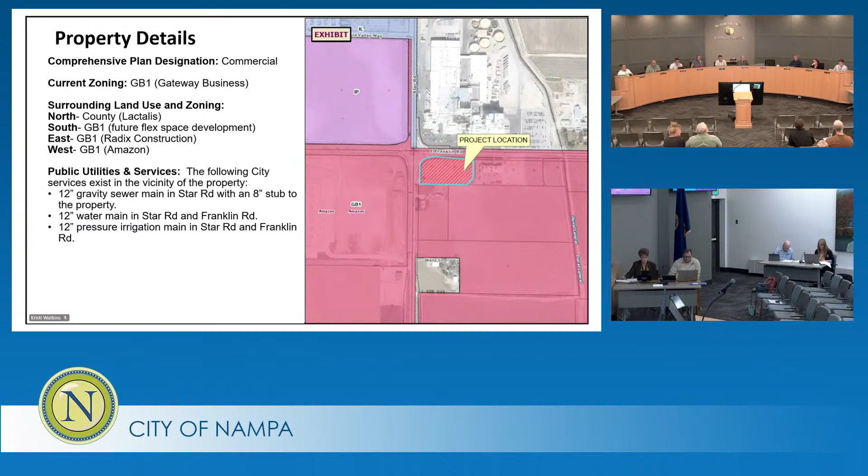There are public utilities and services available to this property. So a little bit of history on this.

This property was annexed and zoned to GB1 in 2008. It has a development agreement that basically describes this corner as a commercial corner and lists out some uses agreed to with the cheese factory previously, as far as what would be allowed and what wouldn't—fuel stations being one of those, with a conditional use permit.

In August of 2012, a development agreement modification was done just to adjust the schedule of land uses, and that was approved. May 2021 had a pre-application meeting, and July 2023 there was another pre-application meeting.

November of 2023, their variance for frontage landscaping was approved. The reason for that request was because Franklin Road has been widened based on the extension over to the new Highway 16, which cut into the frontage originally planned for that parcel, narrowing the space to a point where it wasn't very functional for them.

January of 2024, they got design review approved for their building by staff. The reason this is coming at the end of all these other things is they wanted to make sure those other items were taken care of first. Design review can be done at any point during the process.

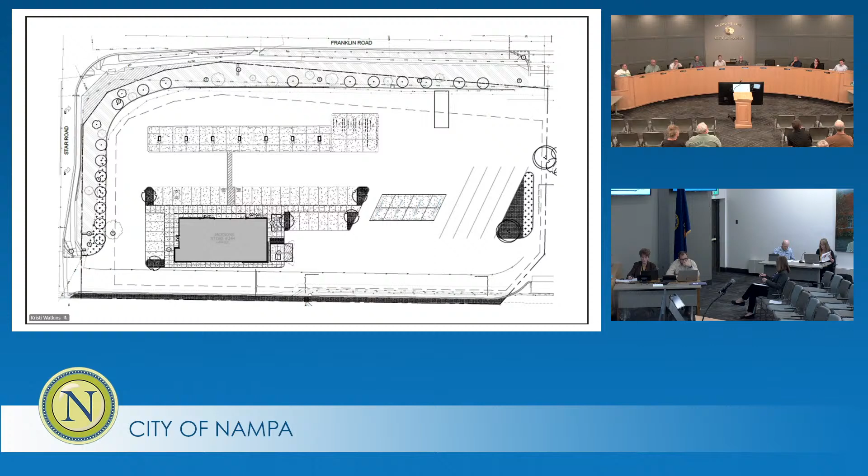Here's an example of the design review elevations that were approved. This is an example of the site plan that includes the landscaping with the variance that was approved. This is the conceptual site plan that was in the development agreement.

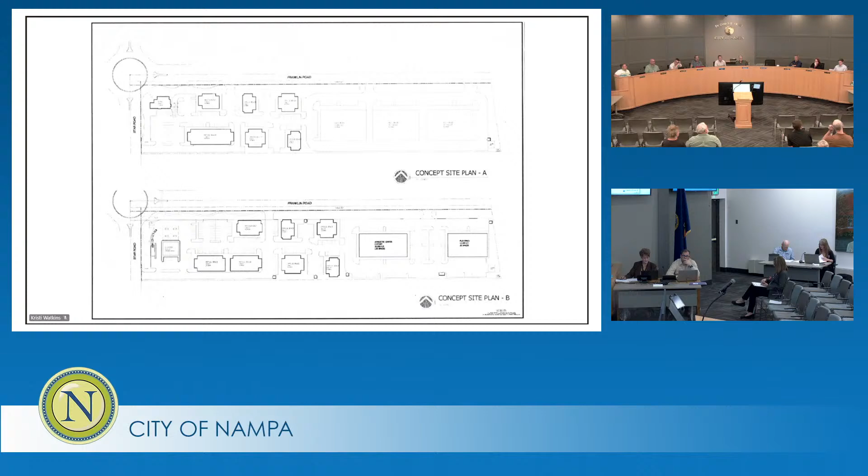As you can see, it's a commercial corner. It doesn't say specifically that it has to be one building or six buildings—I think there's some leverage there. This is the proposed retail elevation, which is actually what is built for the Radix building to the east.

Going back to the design review elevations, I think you could say that they technically meet the requirement with the jogs and offsets in the building elevation.

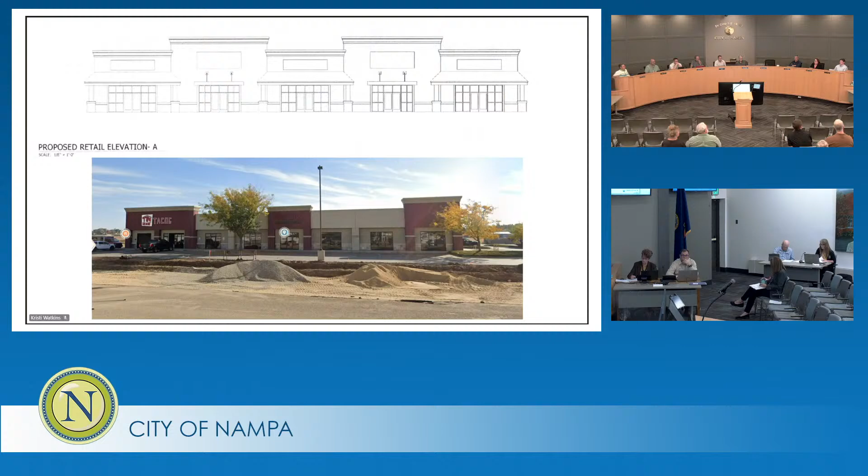Do you have any questions for staff? Kristi, quick one out of curiosity: the Valley Regional Transit, so they're requesting a standard bus stop with just a concrete pad, that's it. They're not, the applicant won't be responsible for putting in the benches or whatever that might be. Is that Valley Regional's responsibility? Chairman Kirkman, that's correct, just the pad that's large enough for ADA access, and then if they are able to put a route in there, they would come in and install the furniture.

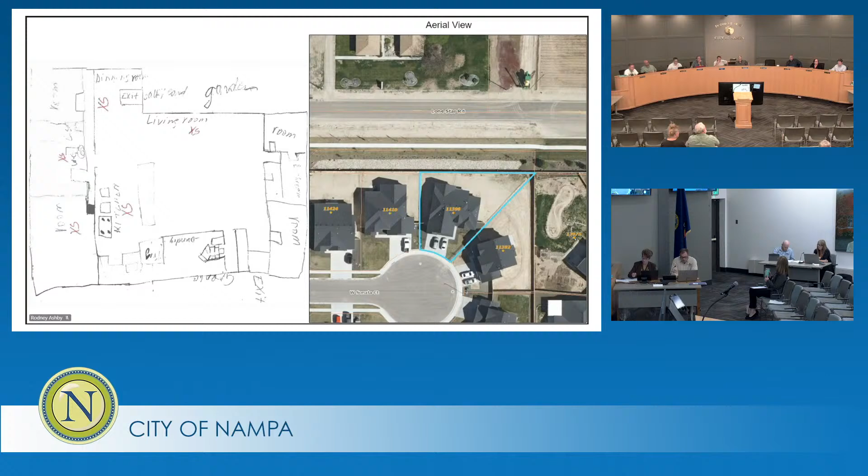I'm just going to kind of go through these pretty quickly. You've seen these. They do have to meet the requirements of the home occupation daycare. If they exceed those requirements, then we withdraw that conditional use permit, and they would have to find a new location.

For instance, if they were above the 12 children, there's a lot of different codes related to that. It becomes a commercial daycare.

So, conditional use permit criteria, you've seen those. The building department indicated the same thing that I just mentioned: if it goes above 12, it moves into a different category.

And the fire district indicated they'll need a fire inspection form filled out and approved. Pretty standard stuff. They look for safety for the children.

Nampa Engineering, several years ago, maybe last year, we looked at the trip generation manual for traffic for these kinds of facilities, and there's nothing in the trip generation manual for a home occupation daycare. So we did the best we could, looked at it, and said I think we're going to be generating about 6 to 10 trips in these in-home daycare situations.

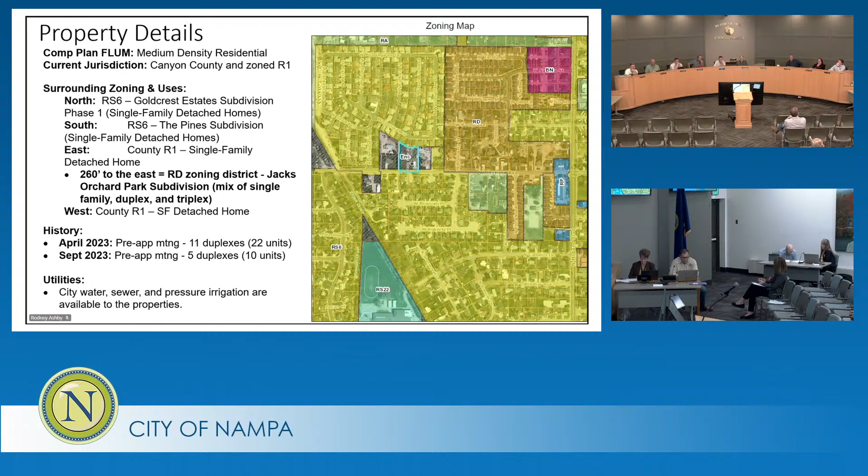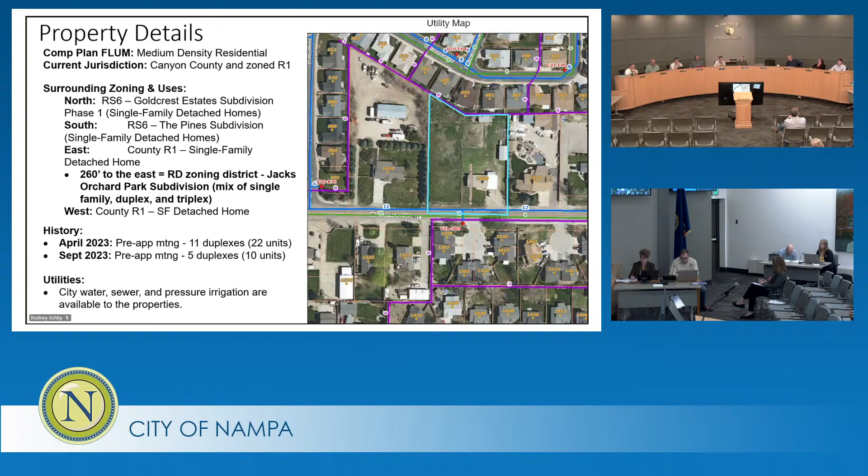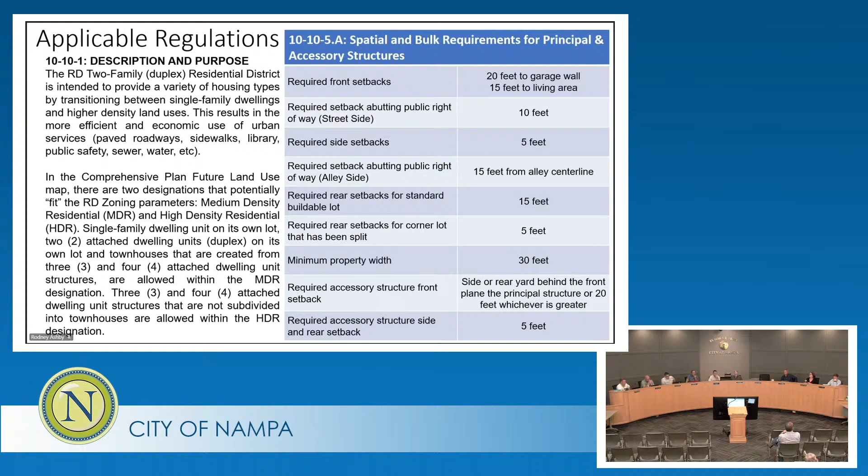So for the plat, first the RD zoning, there's the purpose and description for the RD zoning, and then the spatial and bulk requirements listed on the right. Pretty standard. Density requirements in the medium density residential district or designation on the comp plan, so that's 2.51 to 8 dwelling units per acre. And then the lot sizes are 6,000 to 12,000 square feet.

Subdivision policies and short plat descriptions of what needs to be done for a short plat to occur. This meets that description there. We did receive comments from engineering primarily about the plat.

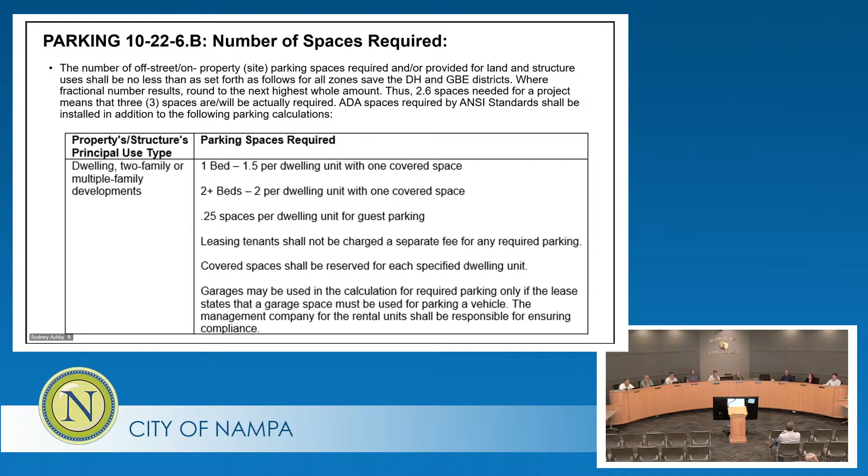I also wanted to highlight the number of parking spaces required. This will be evaluated during the permit stage, as building permits are pulled, but it looks to exceed this pretty significantly with garages, and it looked like it was 2-car garages and 2-car driveways, so I think we're going to be plenty fine.

Nampa code compliance listed that the property currently has weeds and debris throughout the property, and so that will need to be taken care of before the annexation can be completed.

And then the engineering division conditions - Nampa Fire District said that it's 1.6 miles from Nampa Fire Station 4, with an approximate response time of 4 minutes. Their goal is 5 minutes and 20 seconds. And then they talked about the impact to the need for firefighters, which would be 0.03 firefighter positions.

Police, really similar, 0.03 additional officers are needed with 0.02 additional support staff. Building comments are pretty standard here, just that they need to meet code.

This is an enclave property that is in an area that has developed into the city with the exception of a few single-family enclave county parcels. Our comprehensive plan really encourages us to do infill, and that would fit here.

And again, just wanted to highlight that the medium-density residential district or designation in the comp plan identifies duplexes as an intended use.

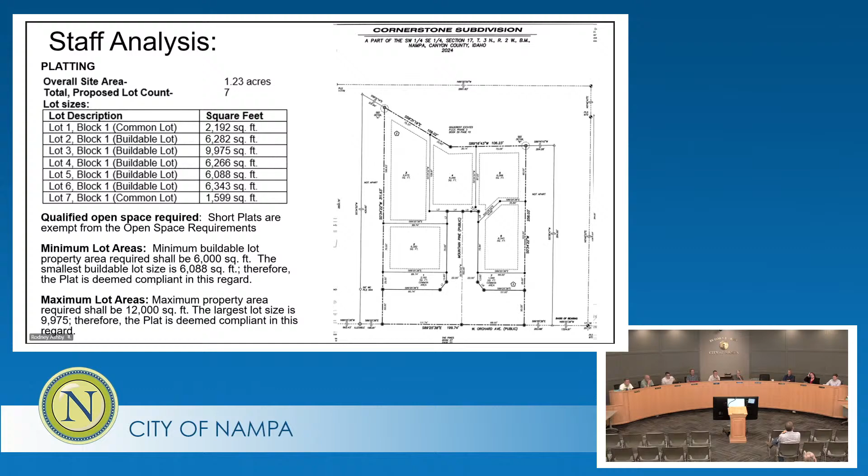That was the preliminary, and here's the final plat with the lot sizes listed. They did provide a landscape plan, but again, it was not required, and that's what you're seeing here with that frontage landscaping required.

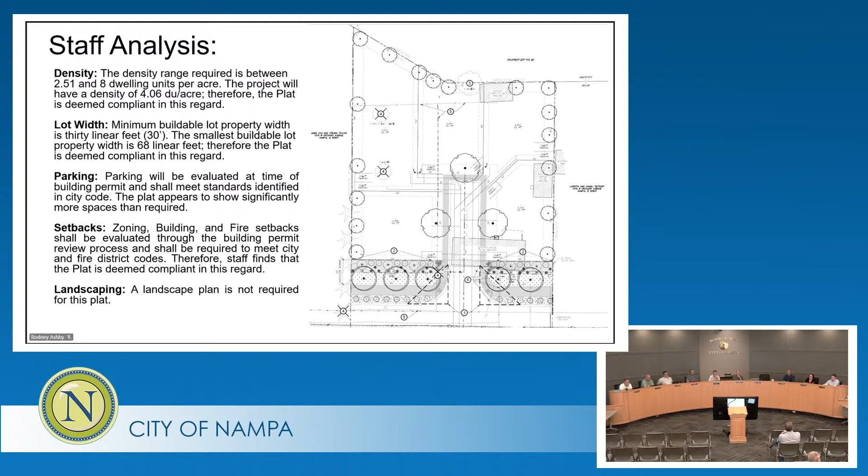Here's the proposed conditions of approval, proposed findings with each of my conclusions I'm recommending, and the short plat finding that it did meet city codes. Here's a couple of motions for your consideration, and I'd be happy to answer any questions.

Thank you. Any questions for Rodney? All right, seeing none, we'll move on to public testimony. Madam Clerk, do we have anybody signed up for this one? Mr. Chair, we have one person signed up to speak on this item, and that is Mr. Dave Darr. Mr. Darr, if you're here this evening, come on up, state your name and address, and tell us what's on your mind.

1621 West Orchard. We are against this because there is a lot of traffic already on Orchard. Karcher is overloaded, and they're moving more and more traffic to Orchard, and Orchard is not capable of handling extra traffic. Also, it's a multi-family unit that they're putting in there, and we don't have any of those around, so we're concerned about overloading the traffic even more.

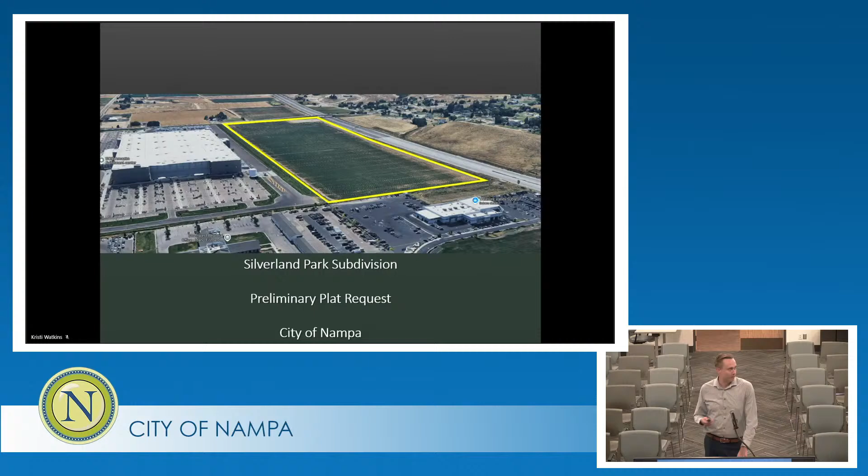Thank you, Chairman. Commissioners, my name is Connor Lindstrom with KM Engineering, 5725 North Discovery Way, Boise, Idaho, 83713. I'm representing Mr. Huter as the property owner. I work with KM Engineering, who's the civil engineering firm on this. So you'll see here, this is just a general aerial shot from Google Maps. The property we're going to be discussing tonight - it's a request for a preliminary plat for a subdivision called Silverland Park subdivision within the city.

Here is just a vicinity map. This property is directly south of the Amazon Fulfillment Center - can't miss it as you're driving down the freeway. So this is the field between the freeway and the Amazon Center there. Then we're west of Star Road and east of the Subaru dealer.

Next here is the zoning map. So this property is zoned as Gateway Business, or GB1. It's a 49.6 acre piece of property. It's a prime location for a commercial development.

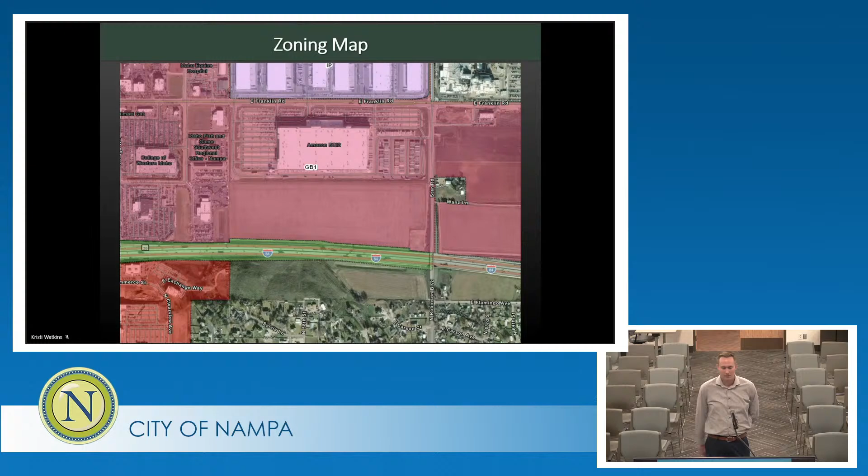This subdivision that's proposed is an 18-lot subdivision, and it's going to be geared strictly towards commercial uses. Really the point of this is to entitle the property and then for the lots to be sold off to any kind of commercial user that would fit within the zone. They'd have to obviously get building permits or go through additional entitlements as needed, but generally have 18 lots ranging from 2.56 acres on up to 4.58 acres.

And there's a private road that'll run through the site. It'll come from Star Road on the east, go through and back up to Franklin through the Amazon property. There will be a shared access easement there.

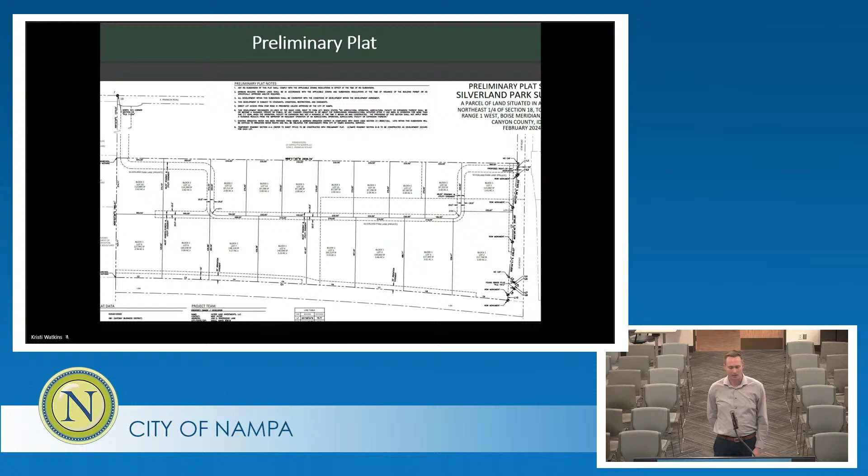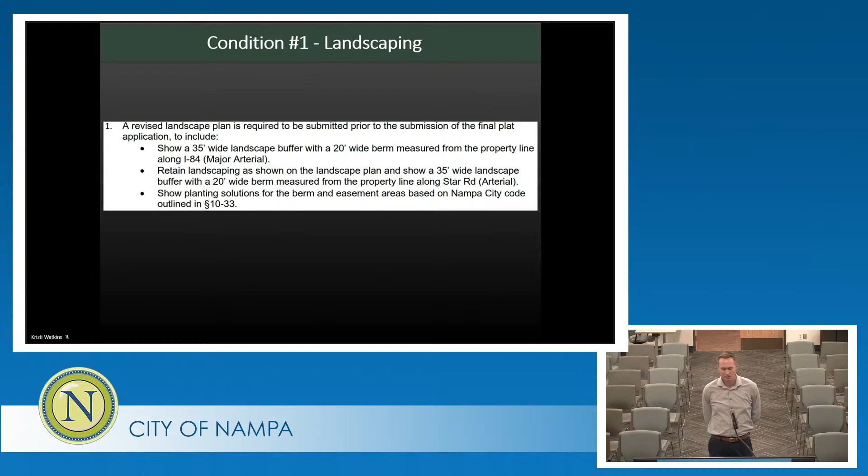As I move along, we have no concerns with the staff report and the findings of fact, except for one specifically. Condition number 1, bullet number 2 — I'm sure Kristi will go into this a little more too. There's a berm that is required for landscaping along Star Road because it's an arterial roadway. They're looking for a 20-foot wide berm.

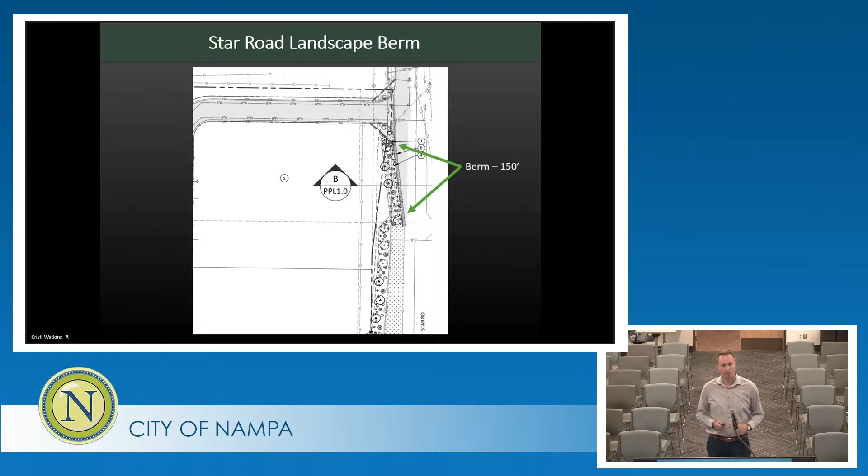However, we had some previous conversations before we submitted, along the timeline of when we submitted earlier this year, I think it was in February. We spoke with staff, and there was a staff member that was amenable to allowing us to only have that berm along that portion of the frontage because of the overpass there. It just doesn't really make a lot of sense to have a berm up against the grade, the slope, because you're screening something that doesn't need to be screened. It just didn't really add up for us.

And I think in talking with Kristi today, we sent over that email. We found it from February. So I think they're amenable to changing that condition, but I'll let her address that a little more. That's the only condition that we really would like to see changed. Other than that, we're on board with everything else, and I can stand for any questions.

What would you think about building like a 65-foot berm? Yeah. Well, there's a pretty big berm there already. Yeah, you'd have to ask the property owner on that one. I'm not going to agree to that.

Mr. Chair, I do have a question. I know that this is going to build out whenever it builds out, but what is your vision or the property owner's vision for what this might look like? Is it something that maybe 10 Mile and the freeway is looking like where Scheels is, or further down on Eagle? And the reason I ask is we have a lot of warehouses, and I know this is not industrial, but just kind of, if you have an idea of what your vision might be.

Yeah, Commissioner Kirkman, great question. In speaking with the property owner, he's been in contact with multiple different users, and there are options for a multitude of different uses — hotels, additional car dealerships like you see there.

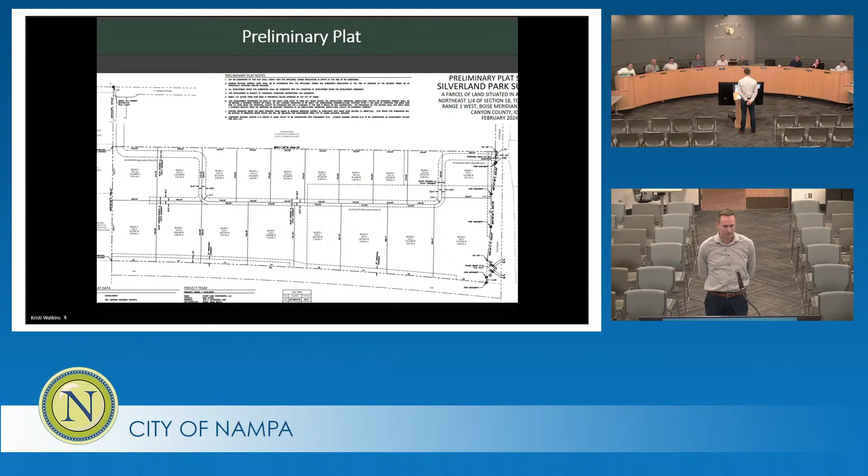Any other questions for the applicant? All right, thank you, we'll call you back up. Okay, thank you. Do we have any?

Kristi, staff report. Thank you, Mr. Chairman and Commission. Kristi Watkins, Principal Planner for the City of Nampa. You heard the request tonight, it's for an 18-lot commercial subdivision.

I envision this very similar to the Empire Business Park that's over on the other side of Idaho Center Boulevard behind the auto dealerships. Those buildings are also in the GB1 zoning district, and they are subject to all of our design review requirements. Most of those buildings have been built out very nicely, with a lot of design elements to them. I would like to see those same things happen in this area in front of Amazon, to screen that building from the interstate.

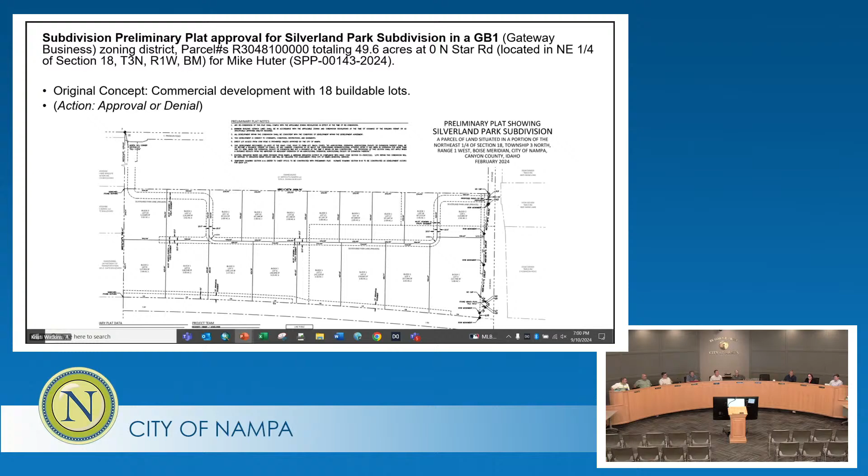So that's my vision for it, and I feel like maybe this is going to make that work. As stated, the zoning of this property is Gateway Business, GB1. It was annexed into the city as IL and AG in 1996. In February of 2003, it was rezoned to GB1, and we've had multiple projects proposed on it, but none have moved forward, so it's good to see something moving forward on it.

There are utilities available. The traffic impact study is under review, and final design shall comply with the comments in the TIS. The TIS has identified the following triggered impacts: Stamm Lane and Robinson Road will require an eastbound left turn lane. Idaho Center Boulevard and Franklin Road will require reconfiguration of the intersection. Star Road and the site access, which is the circle to the east, will need a southbound right turn lane, northbound left turn lane, and 2 eastbound lanes.

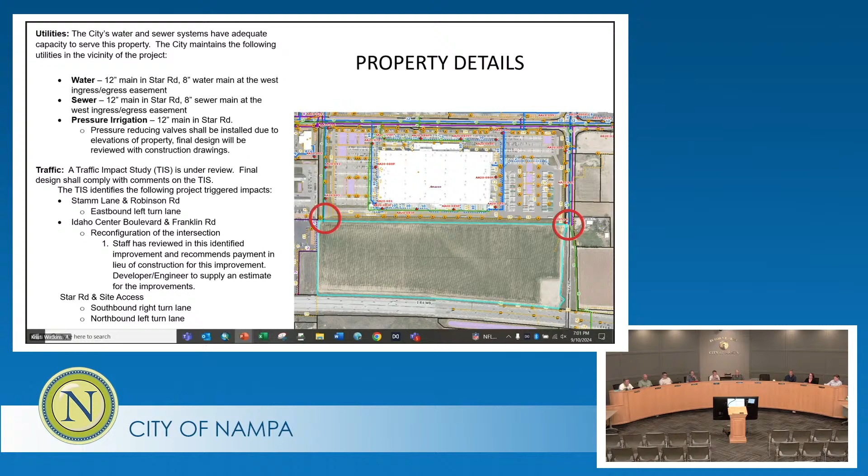The circle on the west side is just showing how they will access through the Amazon property. They do have an easement for that. Correspondence was received from the building department, standard Title IV comments, and the fire district. The project is located 2.4 miles from fire station number 5, with a response time of 5 minutes. Engineering listed utility and right-of-way improvements, traffic impact study review, and other conditions of approval. GIS has just requested some minor revisions to some street names.

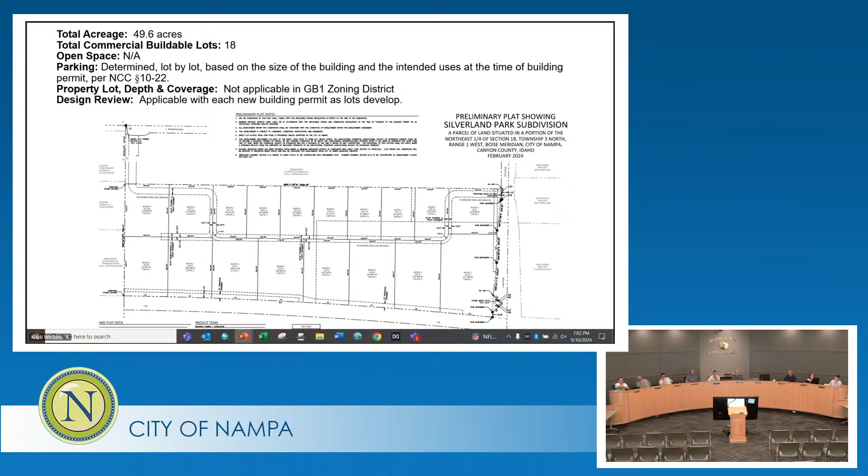This property is 49.6 acres, 18 lots, with no open space required in a commercial subdivision. Parking will be determined based on the intended uses at the time of the building permit. Property lot depth and coverage is not applicable in the GB1 zoning district, and all buildings will be subject to design review.

This is where we were talking about that landscaping and berming. I did talk to Doug Critchfield, our landscape architect on staff, and he says that due to the slope of Star Road, staff will continue to work with the applicant for a suitable solution to the landscaping in that area. Obviously, trying to put turf up a slope doesn't work, and having a berm at the bottom of a slope maybe isn't the best idea either. They've got a lot going on along Star Road on that side — a power easement, an irrigation easement, a drainage facility, and other things that could limit the space available for landscaping. So Doug is willing to work with them on the design.

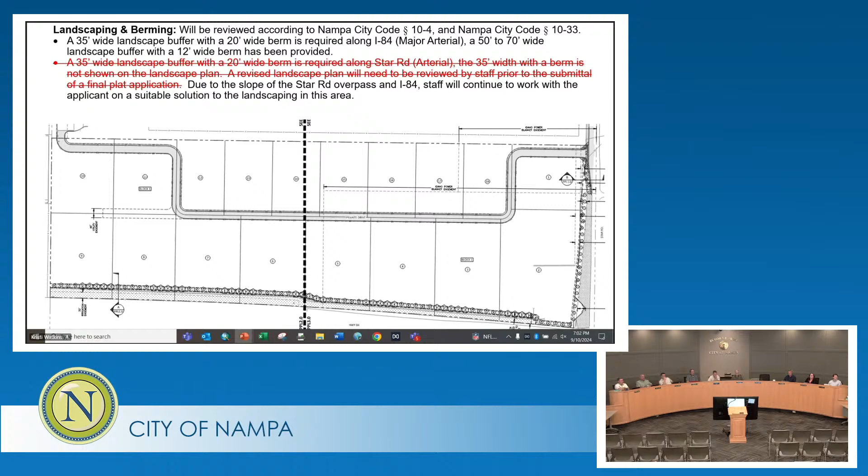So this condition shows: retain the landscaping as shown on the landscape plan, and work with staff to determine suitable landscaping along the additional area of Star Road, as well as the other conditions listed in your staff report. And these are your potential motions. I'll stand for any questions.

Is there a table of approved uses in a GB1 zone somewhere? In Chapter 3, we do have all of the uses that are allowed or not allowed, and also on our website we have lists of uses that are permitted and conditionally permitted. There are some outside of industrial zoning, like heavier manufacturing, but as with Amazon, it's a warehouse, so warehousing is still allowed.

Is there a conditional use permit required for warehousing? Amazon got a conditional use permit, yes. Okay, so it's a conditional use in a GB1? Okay, I didn't review it.

That's it, thank you. Yeah, you're welcome. Any other questions? Yeah, I do have a quick question. Do it.

The 150 feet of berm that the applicant would like to keep rather than going all the way—you mentioned you would work with them on the rest of that. My concern is what happens if that doesn't come to an amicable solution with the applicant, and the city says they really want it to go all the way up the side of Star Road. Do they come back to us for an exception? Commissioner Kirkman, staff does have some discretion to determine based on the topography of a property. If they can't come to a suitable solution, they could request a variance from city council. Okay, thank you.